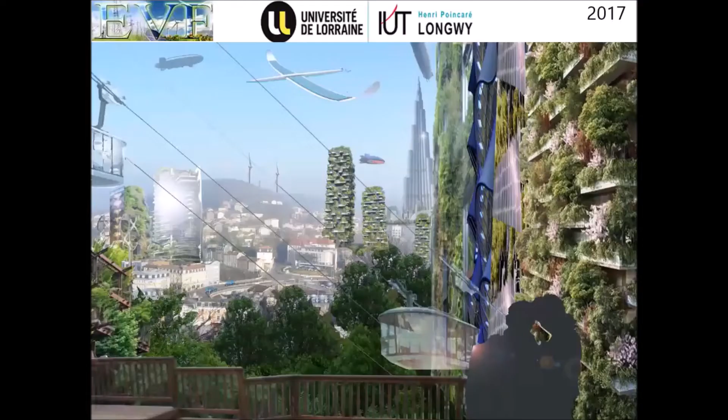Without imagination, the future can't find any support to materialize human progress. As sketched on the slide, the city of Longwy, a very small city in the north of France at the frontier between Belgium, Luxembourg, and Germany, hosted an imagination of 2050 and worked for two days at the EVF symposium in 2017.

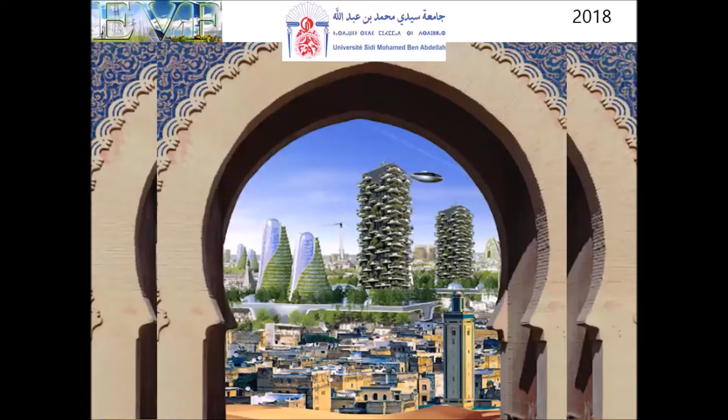Without memory, the future doesn't make any sense. This is a picture of our EVF in Fez, Morocco, a city 1,200 years old. The conference served here as a bridge to connect past and future, history and future.

Then we went to the city of Pune in India, close to Mumbai. This city with more than 3.5 million inhabitants gave some maturity to our event, because it traveled from the Francophone area to the Anglophone area, to a big country with huge questions on energy, materials, and cities. Here the edition reached an international dimension with full English presentation and papers published in E3S proceedings.

The next edition was supposed to be held in Paris, but as you know, because of the health crisis, our session today is meant to make a brainstorming, potentially serving to feed the topics for coming events.

All editions needed huge organization. Warm thanks to Professor Desano for compiling the summary of the Longwy edition, Professor Zorkani for the Fez edition, and special warm thanks to Professor Sridharshan for compiling the summary of the Pune edition, and to his group for such huge work organizing the Symposium of Pune.

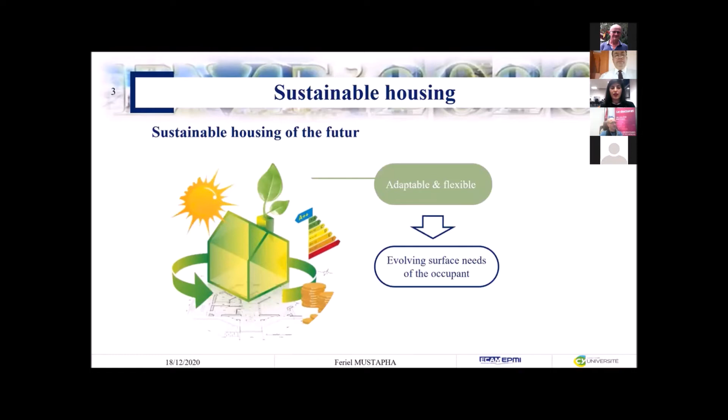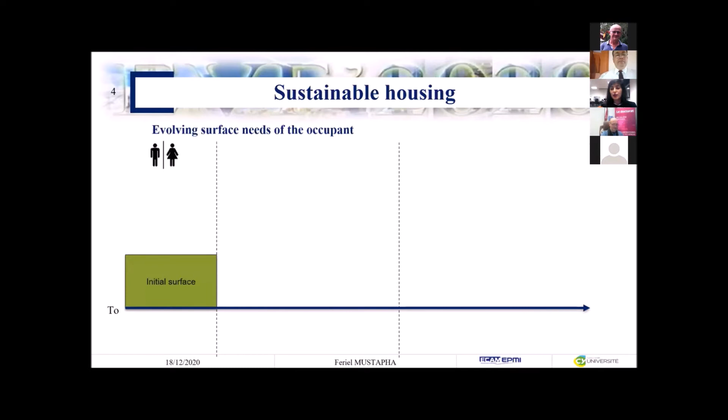So we are only two, we started our life, and after that we got children, which is good, but the surface need became greater. So the initial surface, we added another surface again. And after the children go away or fly away, as we choose, we need again to reduce that space's need.

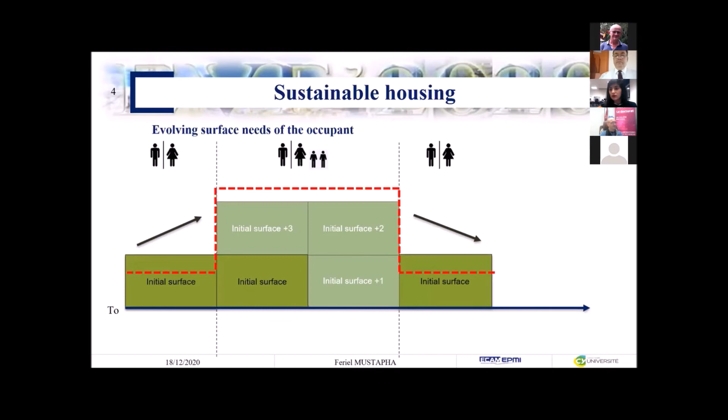So the initial surface comes back again. And if the starting surface is the same, the space is called elastic. And also the energy consumption obeys the same dynamic: when we have a small surface, the energy needs are small also. But when the surface becomes greater, the energy needs become greater too.

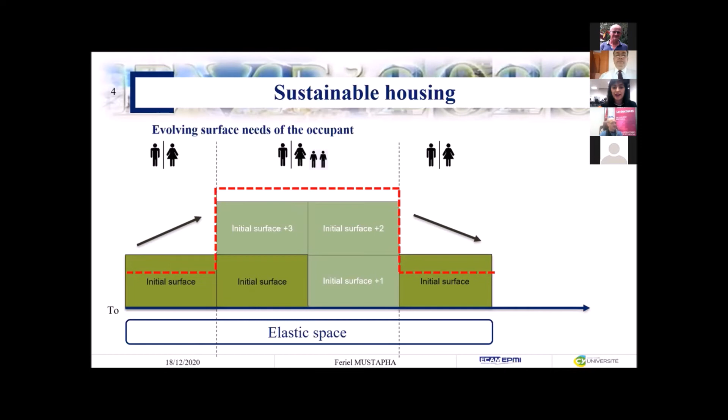So after a lot of research, especially in my field in architecture, the architecture which is compliant with this dynamic is the modular architecture. And for that, we choose a container cell. Why do we choose the container? Because it has some advantages, even if it's designed for logistics first, or supply chain.

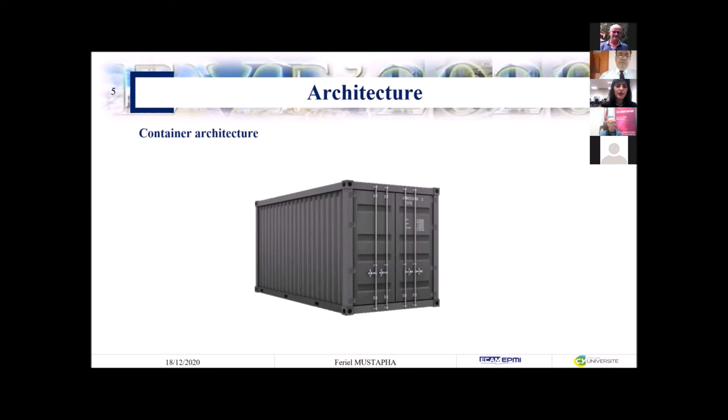So the advantages are: there is a great speed of execution because the unit is already there, and it costs 20% less than conventional architecture. It is made to be stacked, superimposed, or juxtaposed. It is resistant to corrosion and wind due to its envelope. It is also possible to reconvert it into housing really fast.

And finally, there is a really big ecological part, which is recycling, because reusing the shipping container is perfectly feasible.

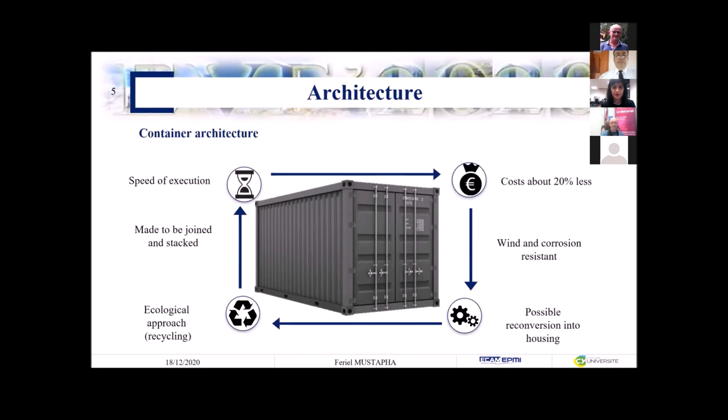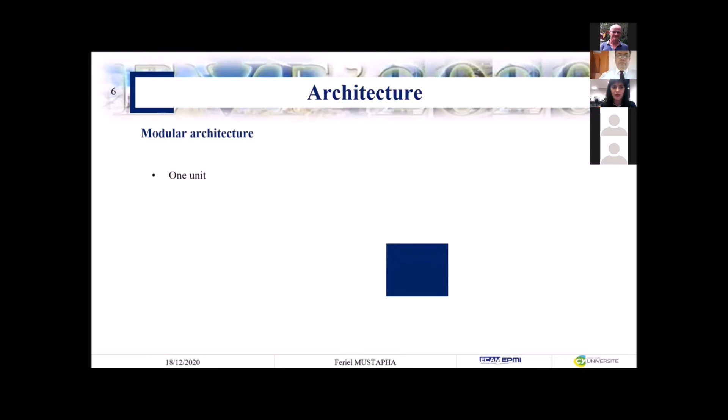Just as a record and as a reminder, the container architecture belongs to the modular architecture. And what is modular architecture? First, we have a unit, or cell, or module - we can call it by all these ways. We can add to this unit another unit by juxtapositions or by superpositions.

We can also add a unit of different size, which is perfectly feasible because the container exists in 20 feet and 40 feet sizes. This structure in general can be modified partially or also globally. And finally, we can also remove some cells. So this architecture is elastic.

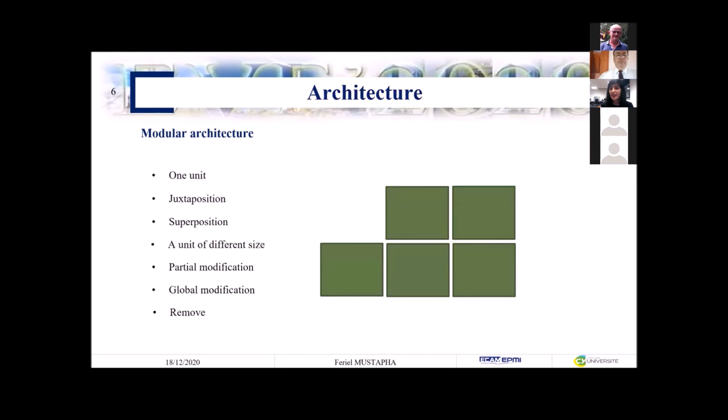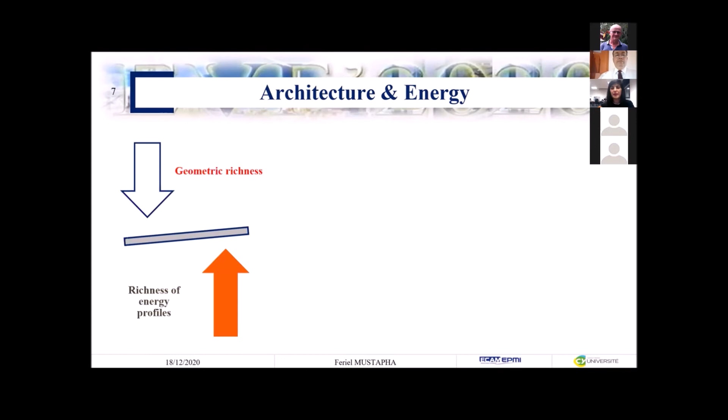And also we conclude that each one of these geometries has a different energy need. So when we have great richness in geometry, we also have great richness in energy profiles that we must take into consideration, especially in architecture. And with this topic of today, energy is becoming a really great and worldwide topic.

So a modular housing is sustainable only when we take first the morphology aspect, which impacts directly the visual and architectural comfort, and the energetic aspect. And here the optimization is.

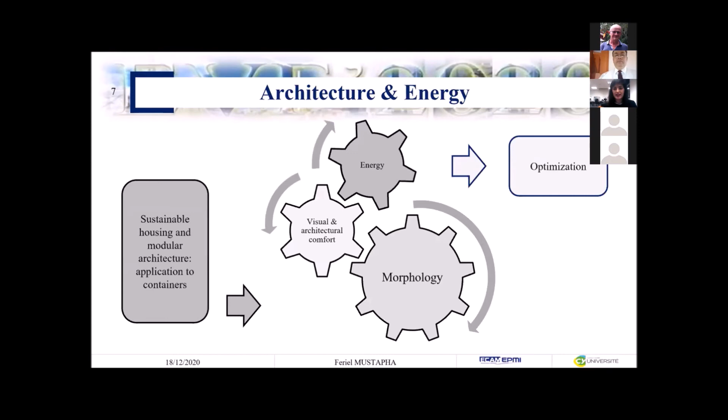And with this in mind, our roadmap is like this. First we proceed by designing the envelope of our unit cell, which is the container. And after, we define also how many cells we're going to need. And this number of cells impacts directly the morphological impact.

The morphology - sorry - because when we combine our basic cells, we're going to have a number of combinatorial morphologies. And we have an energetic impact after that, because every combinatorial geometry has an energy need which is different.

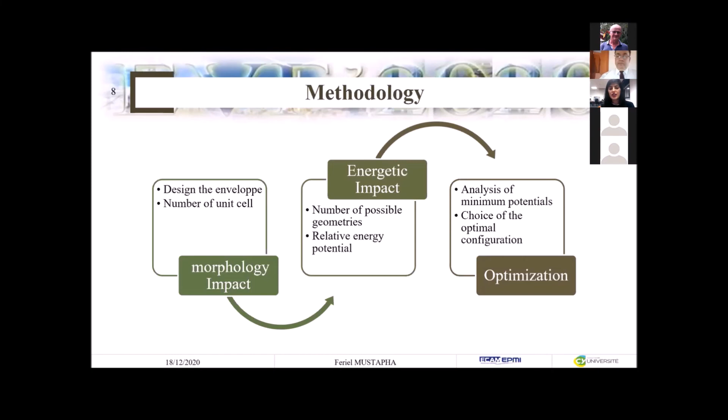And there is optimization. Here we have an example, which is an approach with 8 cells of container and 7 cells of container. What we want to do is to know how to become bigger or how to become smaller with our geometries and energetic aspects.

So the optimal shape by our method with 8 cells is the one on the left. And the optimal shape with 7 cells is the one situated on the right. The optimal, in our case, is the one that expresses the least heating demand per year.

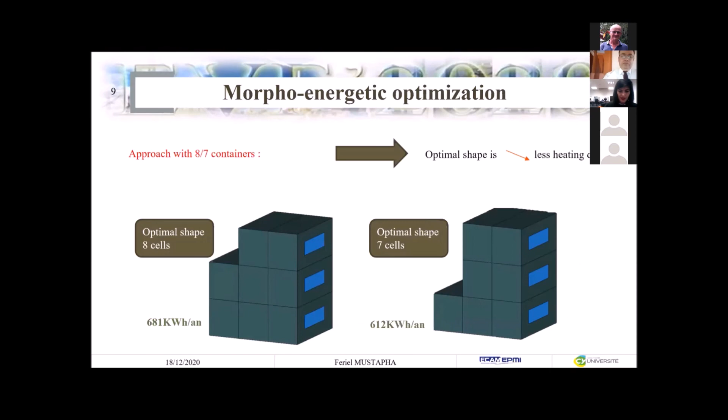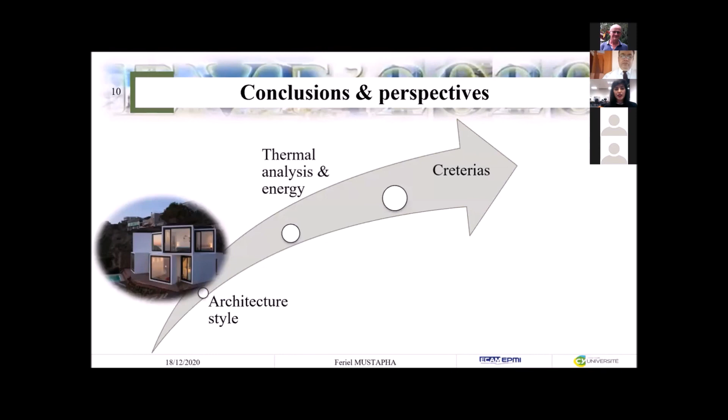And I will be really short. The point that we want really to express today is that treating only the architectural aspect by choosing the style of architecture is not sufficient alone. We need to treat also the thermal aspect and energetic aspect in general. But to achieve a really good optimization, we have to take into consideration both points.

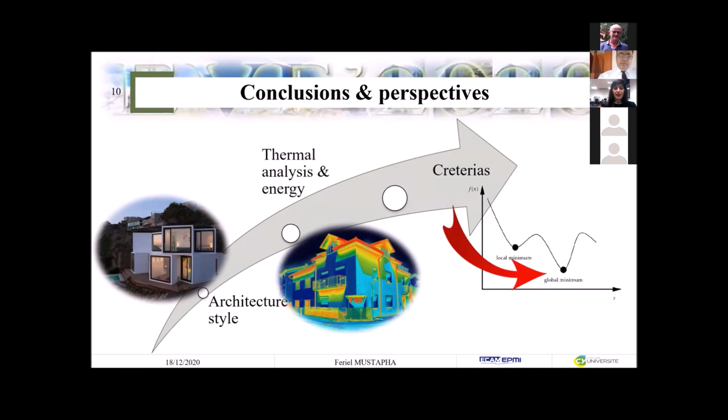And finally, we're going to achieve the goal of the energy and cities of the future. So the impact of architecture and energy is highlighted. So we conclude by this.

And we want also to improve our holistic model, which today is only thermal, but we want it to be more than that by taking into consideration the civil engineering part, the material part, by also using different materials, not only the Corten steel of the container - moving to another unit, which is a wooden unit or concrete unit.